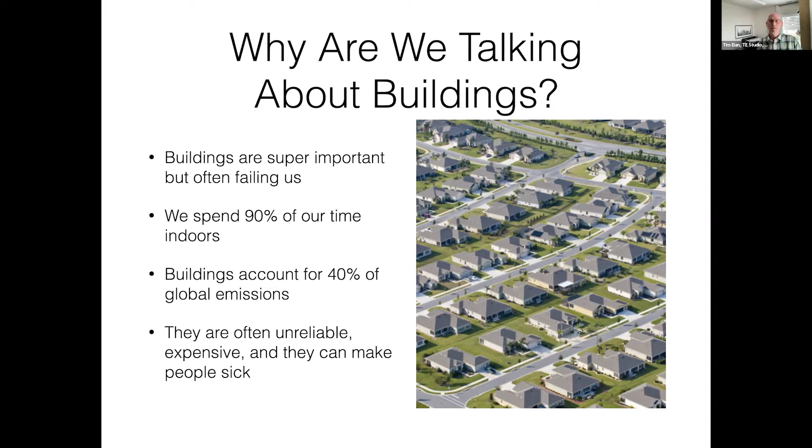So let's for a moment then just imagine the perfect building. It could be your home, your school, workplace, a place for entertainment. How would you describe it? It's a question that I ask clients, that I ask when I go out in public. And here are some of the highlights of what I typically hear. In a cold climate like Minnesota, people definitely want to be warm in the winter inside of a building. But also with the climate shifting a little bit, they are more and more concerned with staying cool in the summer. Nobody likes drafty buildings.

There's also noise associated with that. And more people are talking about wanting low energy bills and little to no fossil fuel use. So they don't want to be part of the problem, they want to be part of the solution. Buildings should generally be affordable to build and operate. I want to stress that second part. Most of you hopefully will understand that building a building or buying a building, while a big expense, is really only part of a larger picture, and that buildings really cost over time. And that's something that we're concerned with as well.

And a really good building should be healthy and free from smoke, soot, pollen, mold, and bugs. Again, these things go without saying, perhaps, but in reality, we've all seen buildings that wouldn't really live up to those standards. Smoke has become a real issue in recent years here in the United States, so it's something that we want to think about. And then coming from an extreme climate zone like Minnesota, we want to make sure that we have a good shelter that can perhaps weather the storm, do a few days without needing energy or infrastructure, and keep people safe. And so that's another big consideration, especially with the climate again shifting.

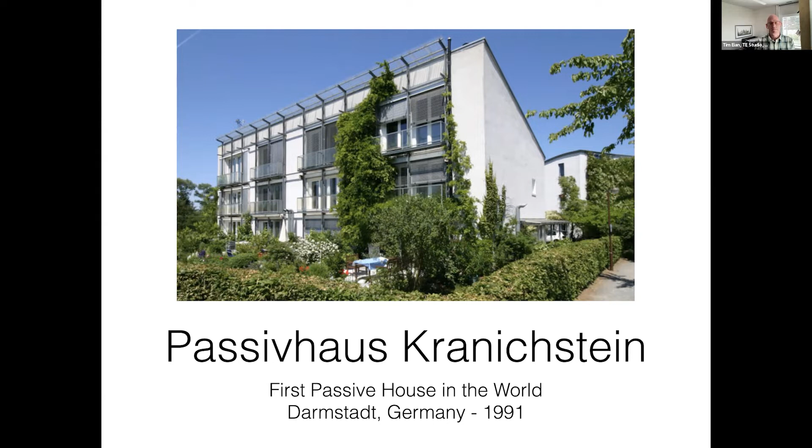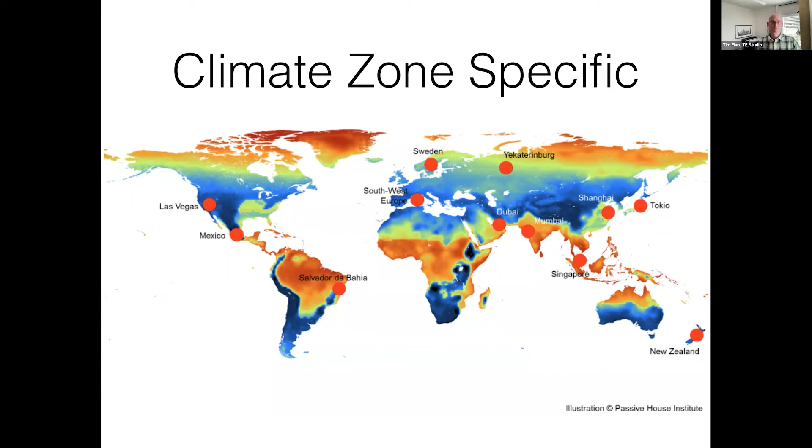Passivhaus is a global standard. The idea behind that is to think globally, but build locally. And it is climate zone specific. So there are targets and metrics and tools that apply depending on where you are on the planet. Arguably, it gets pretty exciting here. I've been practicing Passivhaus for over 15 years here in Minnesota, and our climate has a little of each, right? Hot and humid and dry and cold. And so for Passivhaus nerds, this is a cool place to be just because we have sort of both extreme ends that we need to design to.

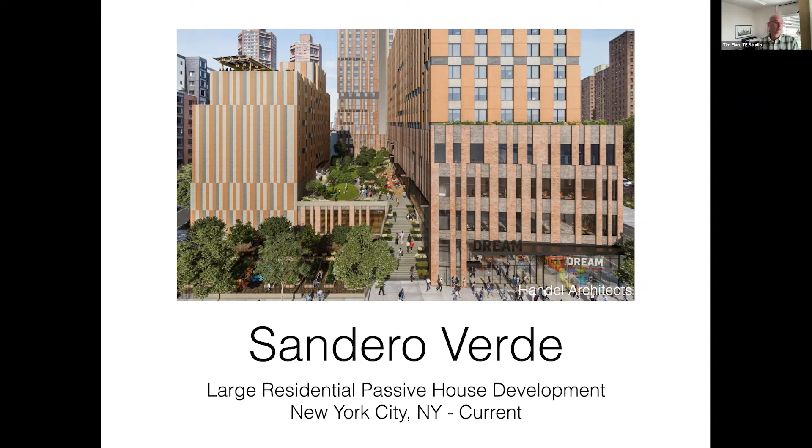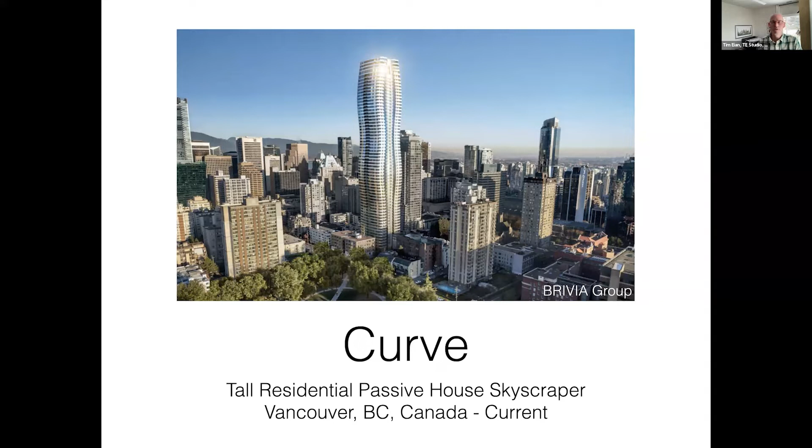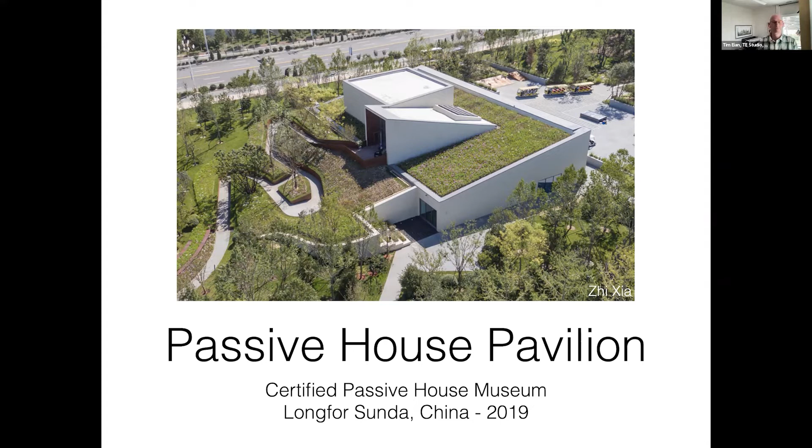Passivhaus is a third-party certified standard. We'll talk about standards a little bit today as well, so you get a little bit of a comparison with other programs out there. You don't have to certify a Passivhaus, but you can. And you can also get certified as a professional to practice in the Passivhaus realm. It's also a vetted tool for sustainable design. And that's a unique selling point for Passivhaus because there are tools that come with this program for architects, for engineers, for consultants that are very, very helpful to illustrate building performance as you're designing. And that's not something that can be said for all voluntary building standards. So this is actually a hands-on type thing. And one of the reasons why I personally gravitated towards it all those years ago.

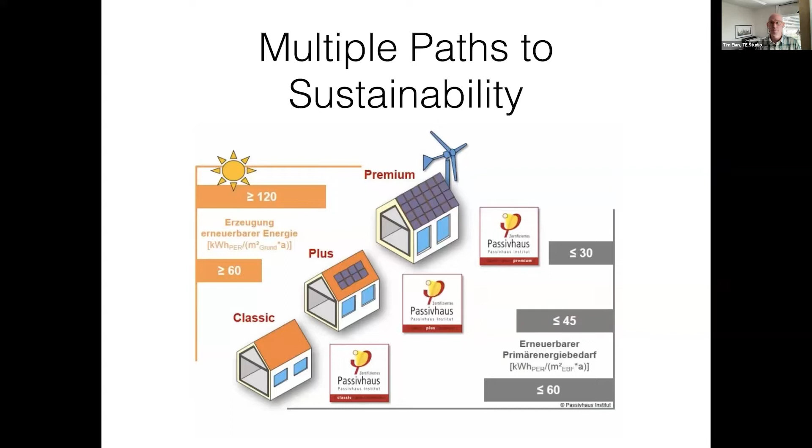There are, as I mentioned earlier, a few different pathways to achieving Passivhaus, and so they happen at slightly different levels of performance. They also bank on varying levels of renewables. The main thing to note here is that you cannot renewable your way out of the Passivhaus standard, meaning you cannot make up for building shortcomings with PV panels or offsite renewables, but you can count them once you make a Passivhaus, and you can achieve a different tier of certification doing that. And again, it applies to all building types, residential, commercial, retrofits, and new construction. And so these tiers can then also be applied to the varying building types. And really it revolves around one basic concept. It's energy conservation first. So we get rid of wasteful energy use, everything that isn't necessary to provide the services that we seek. We try to minimize as much as we can.

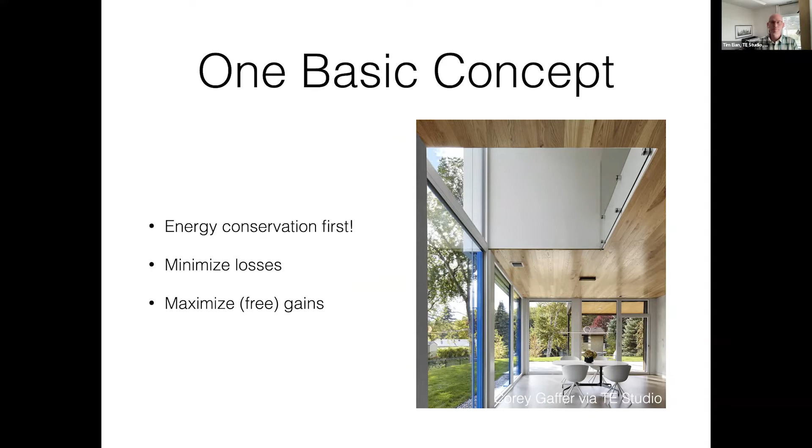5 basic principles from the lower left all the way to the lower right. We have thermal insulation. Now, code stipulates already that you want to insulate a building in Minnesota, obviously, but passive houses will be much, much better insulated. Generally, you can expect 2 to 3 times code levels of insulation in all assemblies, and we want it to be continuous. And then we combine that with what we call passive house windows.

These are carefully selected and put together, high performance frame, good spacer, usually triple pane for a cold and extreme climate like ours. So these will be airtight. They will allow solar heat gains when desirable for the building to bring free heat in and then lock it in with coatings. So they're just a little bit more special than your average window, and they become an active part of the strategy. So think of the building as a thermal battery, and the passive house windows can become the charger for that in the winter. In the summer, it's quite the opposite, and we look at shading them properly.

We want an adequate ventilation strategy at the top. So a passive house, that's the next point already, will also be airtight. And when you make an airtight enclosure, you also need to be concerned with the quality of the indoor air. So we'll have active ventilation in all passive house buildings with a heat recovery ventilator. That ensures that in the winter, the incoming air is pre-warmed with the stale outgoing air, and in the summer, it's pre-cooled. And airtightness is important because leakage in buildings can account for a quarter, sometimes more, of all the energy transfer to the environment. And that's something we don't want. So we want to shut that off.

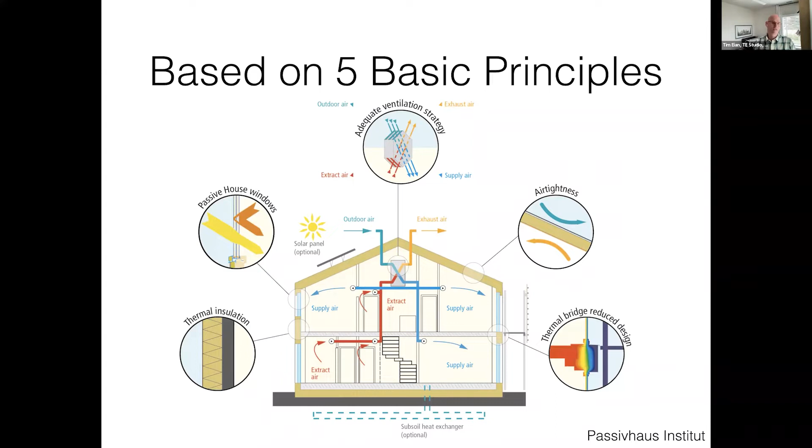You may also wonder how it got its funny name. Active versus passive is really the reason why. So if you consider the buildings of the past as active buildings, you have a building envelope with little to no insulation. It's not very airtight. We're illustrating that here on your left with that window sort of tipped in there. There's imperfections. Now we need a large active mechanical system to provide heating, cooling, those types of services to overcome what the building envelope can't do on its own.

Well, in the passive landscape, we're banking on energy retention and free heat gains. So we really maximize what the building envelope will do, and thereby we can really minimize what active componentry we have to put into a passive house. And that's really where it gets its name. It banks on passive mechanisms, and it's not so reliant on active mechanisms. I'm giving you some numbers down below. Generally, energy is tracked in some kind of energy number per square foot per year. In this case here, the kBTUs, and you can see we're orders of magnitude smaller when it comes to heating energy, and more on that in a minute.

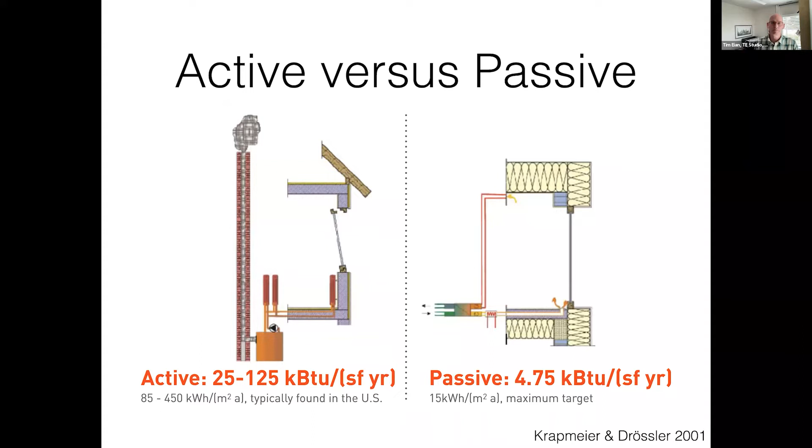So passive house is a real paradigm shift. So if you consider existing buildings and buildings of the past to be synonymous with that tent with the stove in it on the left, it's leaky, drafty, not very well insulated. We have a massive heating system inside of it to keep it comfortable. From there, we're really leaping, and I'm using, metaphorically here, the cooler box as a super insulated envelope, the thermos bottle to illustrate that we're making it airtight. And when you do those things in combo, you can heat it essentially with a candle. So just kind of run with that in your mind right now.

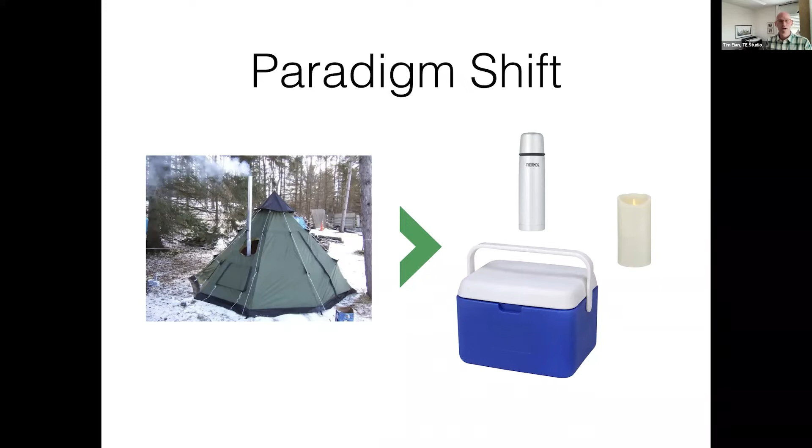Those are the main improvements we're making over the status quo to enable performance. And a few years back, I did a study for the University of Minnesota, and we compared a single family home and its energy usage and footprint between a code building and a passive house. It was the same building, designed exactly the same way. One built to Minnesota code, the other one as a passive house.

And the result is what you see in the slide, the pie chart here. So you can see code buildings consume mostly heating energy in Minnesota, a very significant component. And that in a passive house is massively shrunk. These pie charts are to scale. So overall, I find in a residential setting, to use that as an example, 50 to 75% less total energy use, with the heating energy component seeing the most drastic of reductions. In some cases, over 90% less heating energy is used when the building shell is built properly.

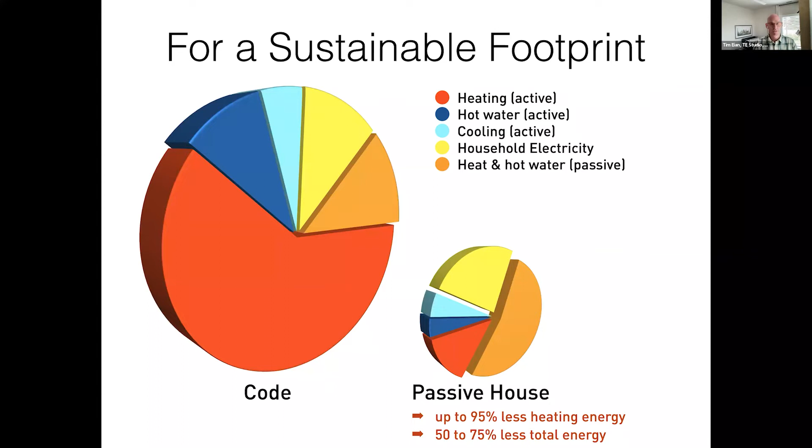And the way that this is tracked, again, is energy per square foot per year. So we establish a gas mileage for buildings, and that's both in our energy modeling and in the real world, you can measure these numbers. And there are some targets. There won't be a quiz here today. You don't have to memorize these, but some of you in the audience, this may be meaningful to you.

And as I mentioned before, there's slightly different tiers. So there's an entry-level certification called low energy building. There's the retrofit component called EnerPHit, and then there's the new construction standard. And in order, they get a little bit more stringent. And you may ask yourself, why do we do that? Well, in existing buildings, the middle tier here, it can be hard to right every wrong, so that you can use a little bit more energy in a retrofit building.

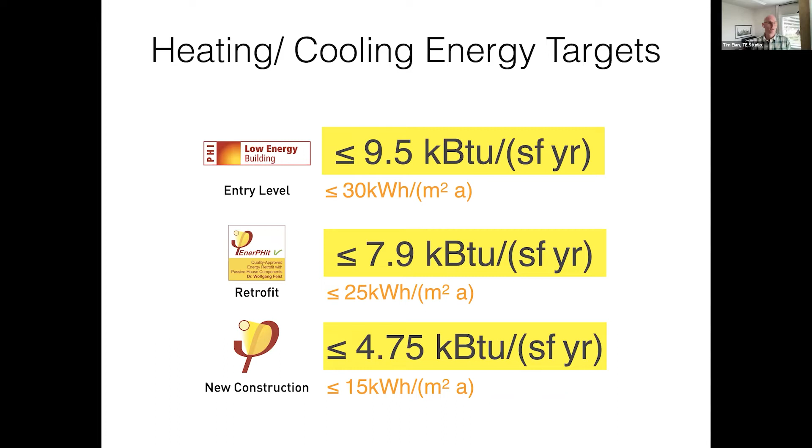And the low energy building standard came out of a desire to be able to certify buildings that maybe have a few strikes against them, even though they're new, meaning either the use or the location don't enable them to meet all the new construction criteria. And so there's an entry level and on-ramp certification that, to be honest, is still a huge leap over code and therefore quite interesting.

There's also source energy targets. Now, source energy is when you track the energy that a building consumes all the way back to where it is made, a power plant, for instance. And the reason why that's being tracked is because that's generally where the pollution happens, where the extraction of energy happens. So we got to make sure we keep a lid on that.

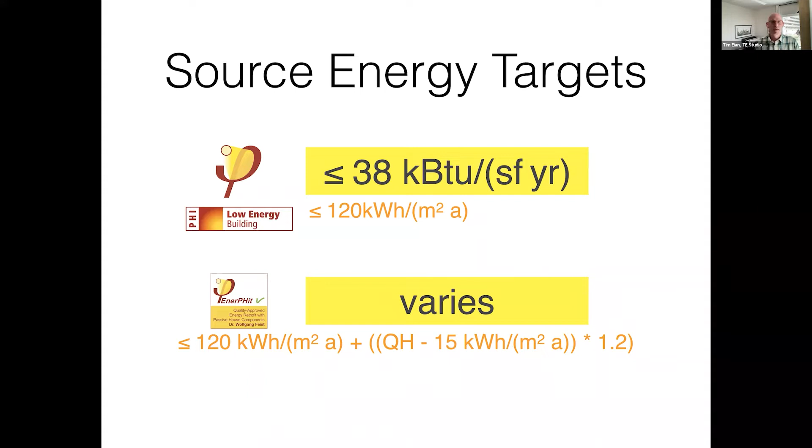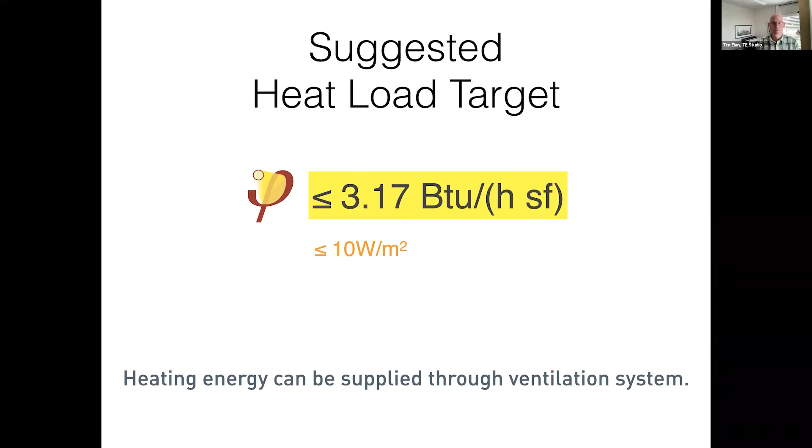And last but not least, here we have a suggested heat load target, and that is something that's difficult to do in Minnesota, but works quite well in more moderate climate zones. When you stay below the metrics here, you can actually heat and cool the building through the ventilation system alone and do away with active heating and cooling systems altogether, which is quite nice, but doesn't work in Minnesota with our current climate data.

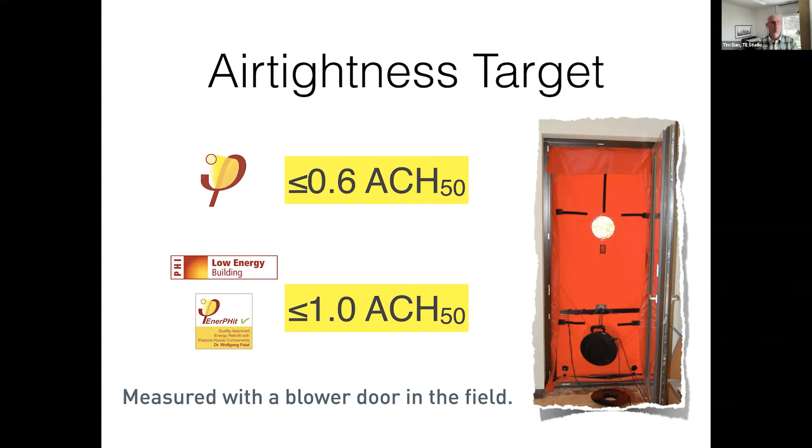Airtightness, I mentioned it before, is a key component here, is also being managed and tracked, and 0.6 air changes at 50 pascals pressure is the target for new construction, and that has been readily achieved for the last 15 years or so since we've had Passivhaus in the United States. Code, for comparison, is 3 air changes at 50 pascals for a residential building, so a Passivhaus is 5 times tighter.

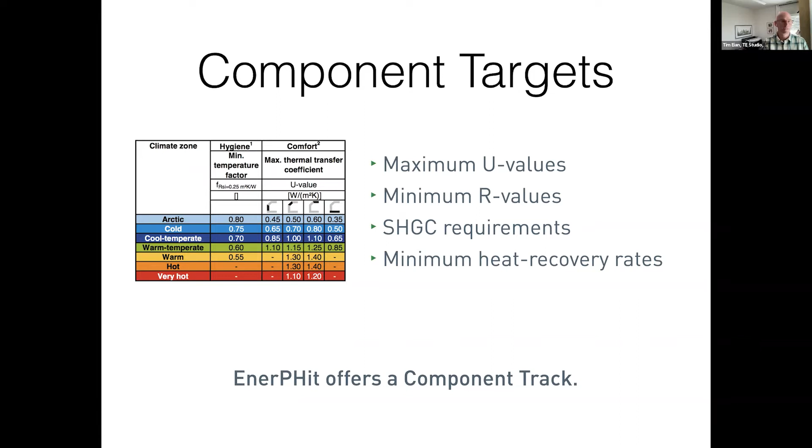And when you do retrofits, you do have some component targets. So sometimes when you can't get the entire building to perform at a certain level, you can also upgrade individual components to specified levels and do it that way. And that can also be very attractive.

All Passivhaus buildings are energy modeled in a program called the PHPP, the Passivhaus Planning Package, which has been vetted the world over by different organizations, including ASHRAE, and found to be very accurate and helpful. And this is the ultimate way to value engineer a building, because concurrently with design, the PHPP will tell you how your building is performing, and you can now be much smarter about selecting windows or glass or insulation.

So just a couple of bullet points here. Principles and metrics apply to all building types anywhere in the world. They're universal, just based on sheer building science. There's nobody who benefits or profits off the standard itself. So there's no agenda in the background.

We're really just using pure metrics to deliver a sustainable carbon footprint and superior human comfort, well-being, and optimized life cycle cost. They're not arbitrary. They're based on these things that I told you that we would like to achieve in buildings. And they're absolute targets with measurable results. Passivhaus has been around since 1991, as I pointed out. So there's been many studies to validate the standard.

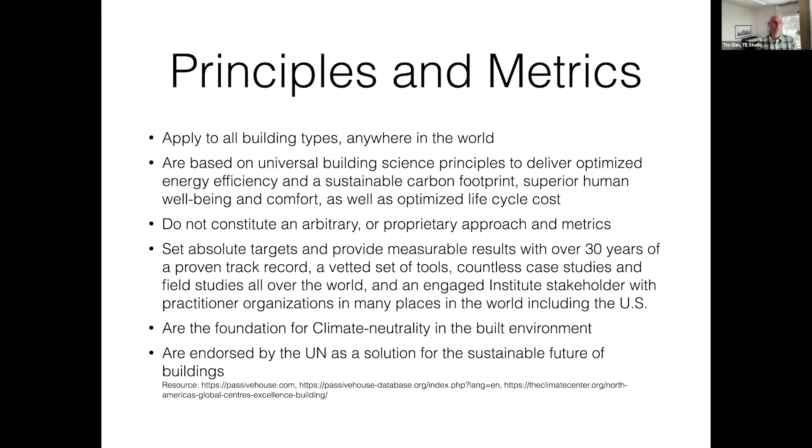It's a foundation for climate neutrality in the built environment, and therefore has been endorsed by the UN as the solution for the sustainable future of buildings. I won't read out all of this here. I just want to give you an idea of delivery and certification.

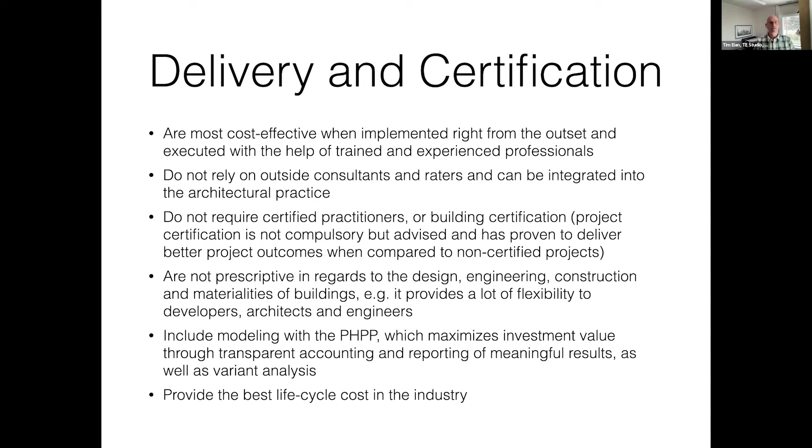Passive houses are ideally delivered by a team of people who have a little bit of history and maybe some education with it. That'll be the most effective way. And while you don't have to certify a passive house and people doing one don't have to be certified, there's definitely some benefits to that. And maybe that's something we'll talk more about today.

Passive House has a very clear focus. It doesn't really compete with other programs like LEED, for instance. It focuses on energy and thereby directly affects your building envelope, mechanical systems, maybe electrical systems, and renewable energy systems. There are indirect components that are affected: water systems, stormwater, building materials, and embodied energy and carbon.

And again, this may be something where we go a little deeper later. I just want you to know it has a sort of laser sharp focus on operational energy first and foremost, and other things are sort of indirect benefits that come with it.

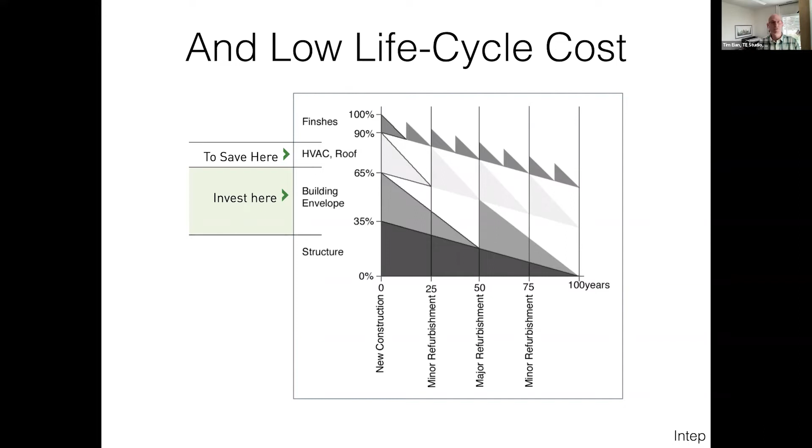But then when we get to HVAC, that may only be 25 years, and with today's tech, sometimes less than that, and then finishes, of course, wear much quicker. And so what happens with the passive house is you're taking investment from a mechanical strategy and dumping it into the building envelope, and thereby every dollar you spend here will go twice or maybe 3 or 4 times the distance. And so it is a smarter investment over time and pays you back.

So with that, passive house defines the long-term building quality and performance independent of energy supply. It reduces the amount of useful energy needed to own and operate a building significantly. So that's sort of my first step here in bringing you what passive house is. Let me show you some examples that are local to us.

The Waldsee Biohaus, 2006, Bemidji, Minnesota, officially the first certified passive house in the United States, actually on the continent. And then just a couple of years later, Passive House in the Woods, a project we did in Wisconsin, became the first certified passive house on the other side of the border. Minifit House, one of the first cold climate retrofits to passive house standard in the world, was a pilot project in 2012. A project that started out as certified passive house became a PHIUS certified multifamily affordable housing project here in Minneapolis, Hook and Ladder from 2016.

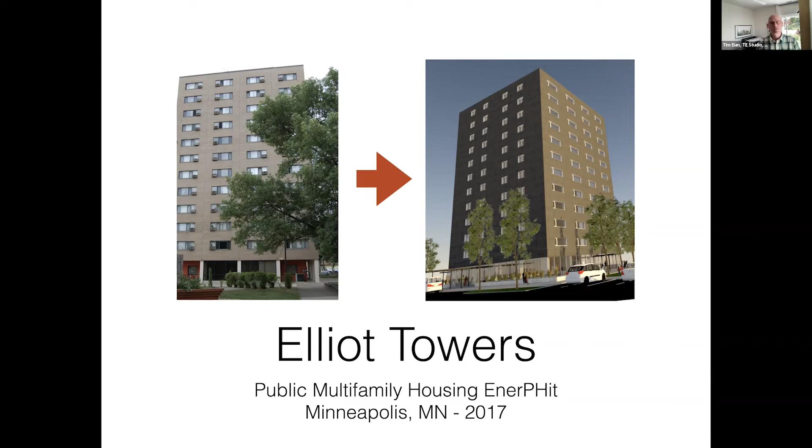And a project that again started out as a passive house retrofit, in this case for public housing, Elliot Towers, later got done a little differently, but these are some of the landmarks that we have. Lexington Parkway Passive House, Minnesota's first Passive House Plus with a significant renewable energy component. Can't see it, it's hiding on the roof. And then the same thing here for Minneapolis in this example. Last but not least, Bright House completed this year the first affordable housing project in the state done to the Passive House Building Energy Standard.

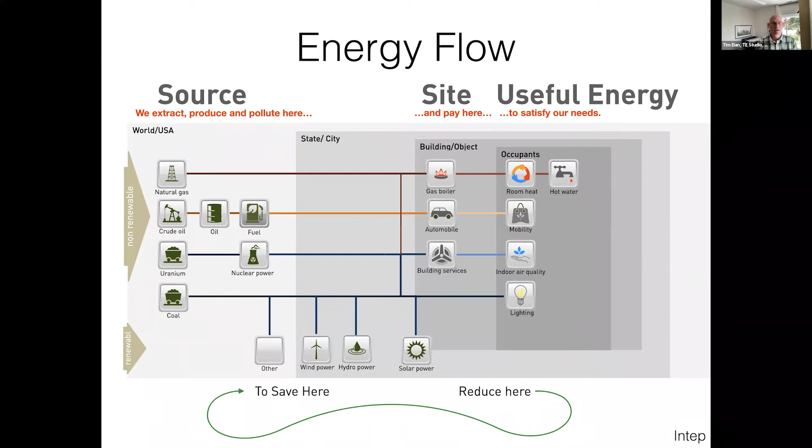So every bit of energy that you can save on the right-hand chart of the site, you also save lots of energy on the left-hand side. And that's mostly because there's loss factors and other things. So there's kind of a thing spinning up. When you save on the right, you save even more on the left. I'm going to skip over that for the interest of time. We can come back to that.

The pledges that we have in most parts of the world are fairly insufficient. We're not really looking all that great at the moment. And the reason why I say that is I don't want to create a doomsday scenario, but I want to give you the impression we have tools like Passivhaus that can leapfrog, that can help us make things like that look a lot better. And with that, we can sort of win our own climate Olympics. Right now, we average about 20 tons of CO2 per capita per year. And to get to where climate scientists tell us we need to be, we really need to bring that down to 1. So that gives you an order of magnitude of what we're facing.

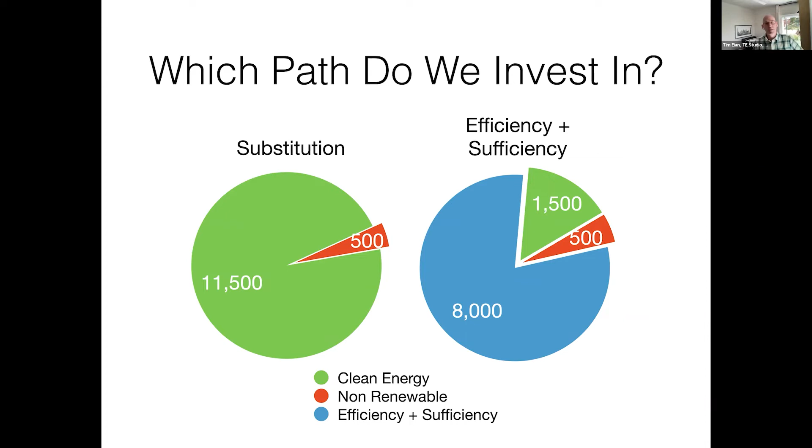So when you bring that back to a residential home, for instance, and the energy that is used there, we have sort of 2 ways that we can do it. We can either try to substitute the footprint that a building has with all clean energy here on the left. So we have to make a significant amount of clean energy, much more than we're making today. And then the other option we have is we simply come up with efficiency and sufficiency measures so that we don't need that much energy anymore. And you can see we have a much better shot at using a green grid wisely and making that go the distance.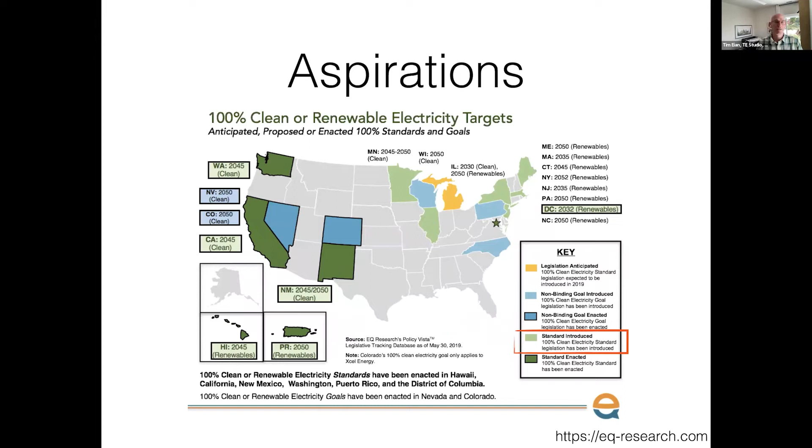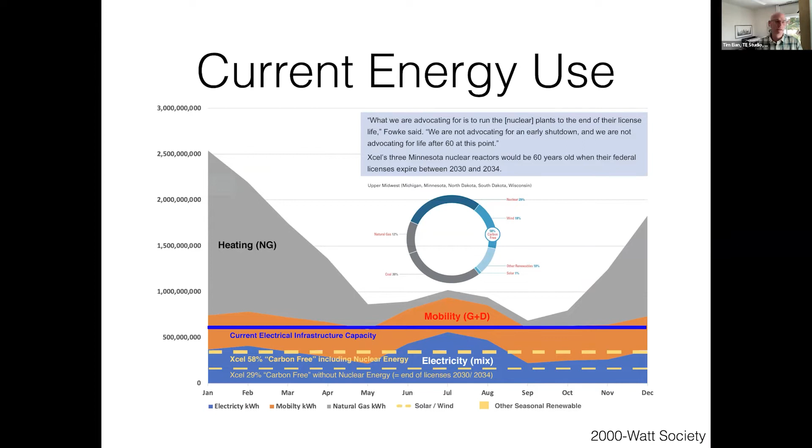So in Minnesota today, again, we have these aspirations. We have a standard that was introduced here for 100% clean electricity by mid-century. This is a graph for Minneapolis, how all energy in Minneapolis is used. When you look at the gray mountain in the background, you can see we use mostly heating energy, much more than we do for driving and lighting and other things like that. And that's really the mountain we need to conquer. So our clean energy plan of business as usual plus electrify everything leaves us with a very, very significant hill.

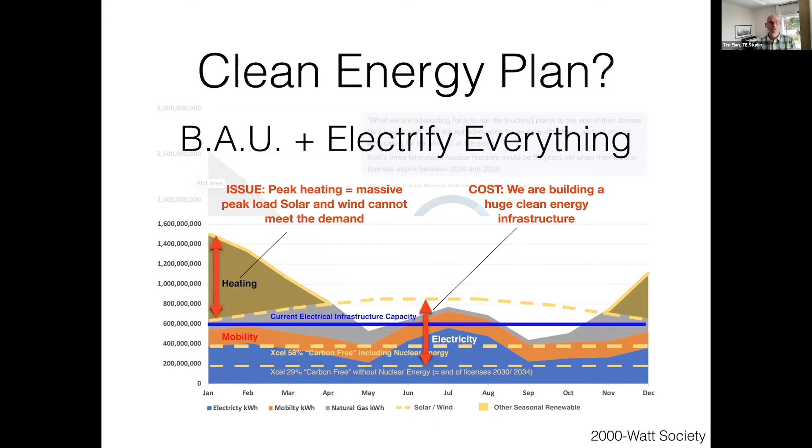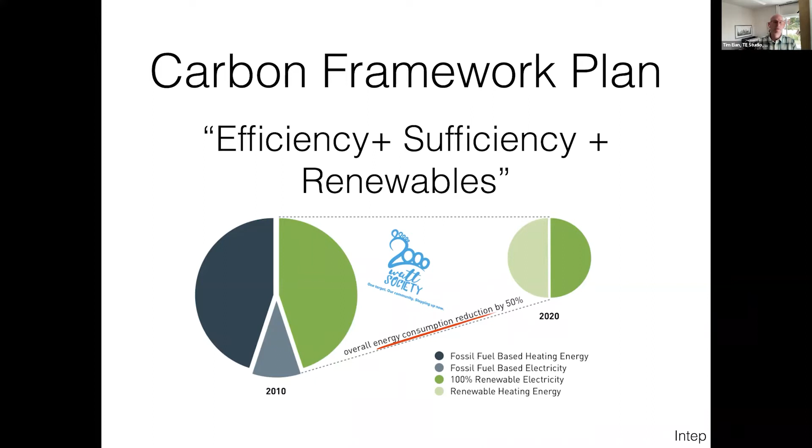So I call that we have a hill and valley problem. We can't make renewables in the winter very well. And so we don't know how to get on top of that. So again, we need to be a little smarter and come up with a carbon framework plan that leverages efficiency plus sufficiency and then modulates the renewables. Here's a study that we did for the city of Vancouver that shows how that's done. You reduce the energy footprint first, and then you come up with fossil-free energy production to get on top of it.

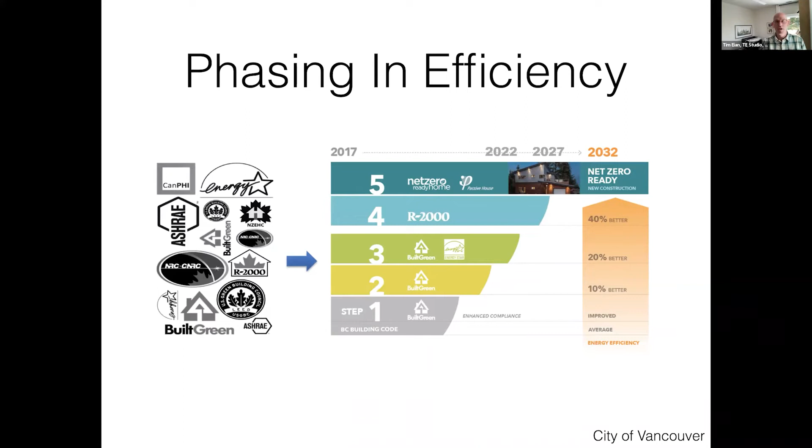And then Vancouver, in turn, decided for buildings, they're going to turn this into a multi-step program, a 5-step program from now until 2032. And this program is currently active. And the way that they're telling building designers to do it is with Passivhaus. This is officially from the city of Vancouver's website, and you can see that spelled out right there.

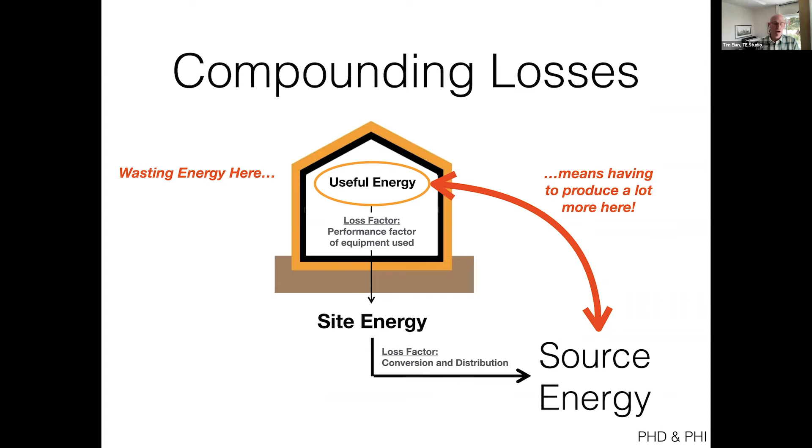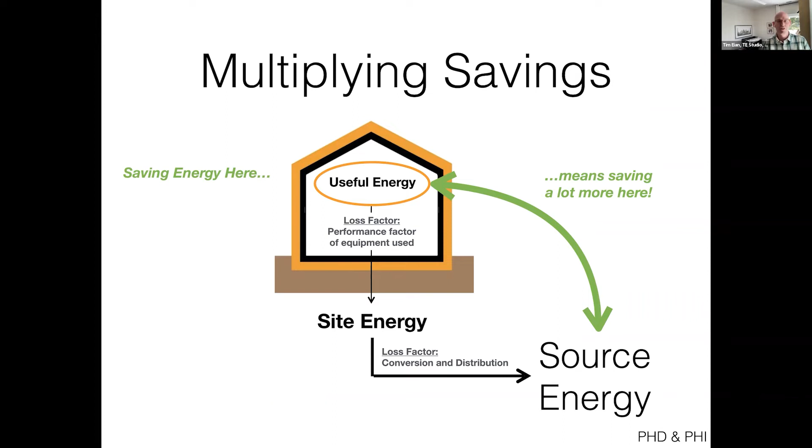And again, the reason why we do it: useful energy has a loss factor to source energy where the pollution happens. So wasting energy inside of the building means we have a lot more source energy we need to make. It's compounding. On the flip side, if we build a Passivhaus and we're very mindful and use energy sparingly in the building, saving energy here really spins up multiplied savings on the source energy side.

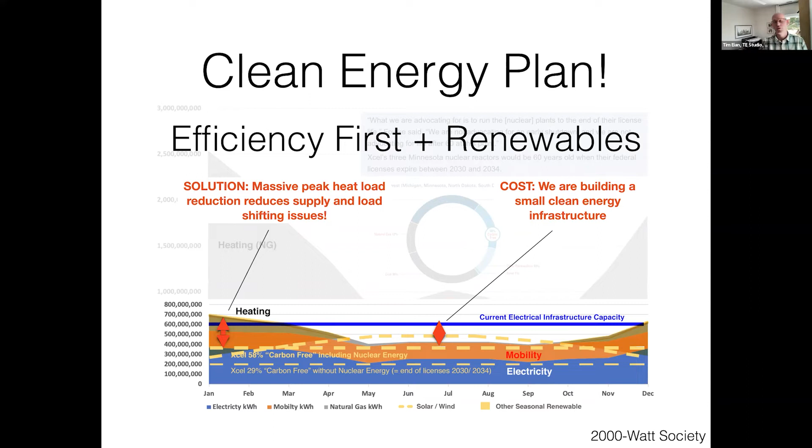And mapping that out for the city of Minneapolis, you can see if we retrofit buildings to Passivhaus and build new to Passivhaus, remember that mountain in the background, I kept it in here, it's gone. We can reduce it so much that we can almost meet the entire demand with our current electric infrastructure. So a Passivhaus strategy works and can help us meet our carbon goals and climate goals and green grid goals that we currently have.

RMI found the same thing. They came out with an outline here called decarbonizing homes, and the term that they coined, beneficial electrification. I won't have time to get into the details with that, but you can do a deeper dive there and see why what I'm telling you today can be done with Passivhaus. And then, by the way, we can also reduce embodied energy.

And one of the benefits of the Passivhaus Planning Package energy model is that it also offers a thing called the PHribbon, which is a carbon counter. So you can see what building materials you're using and how they're affecting that. And you can be smart about doing this in a way that doesn't additionally burden us with climate footprint.

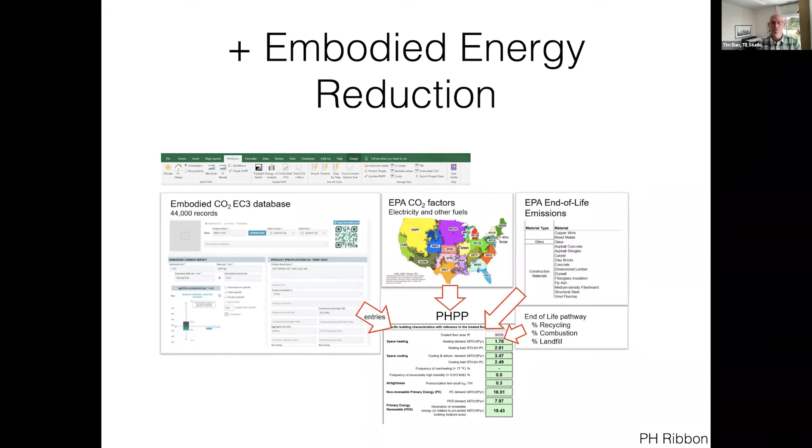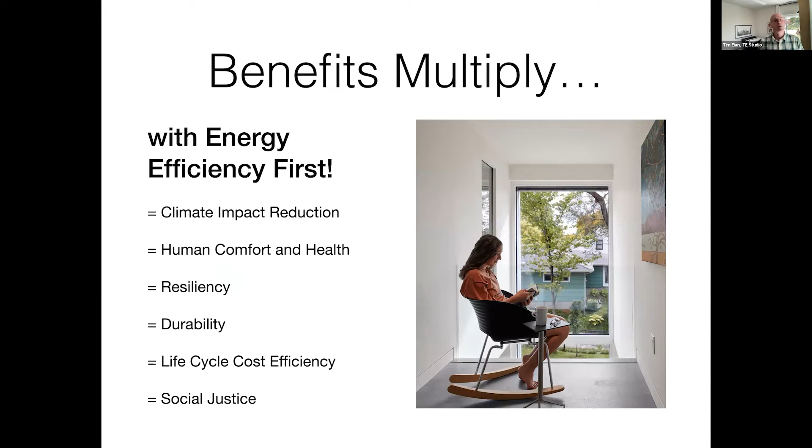So in sum, efficiency first, paired with renewables, is really the foundation for meaningful climate action. And in a Passivhaus, we then multiply these benefits of that strategy with human comfort, resiliency, durability, life cycle cost efficiency. And there's also a social justice component, again, a piece that we could do a whole other talk about, but that's the benefit of Passivhaus. So it transforms the status quo.

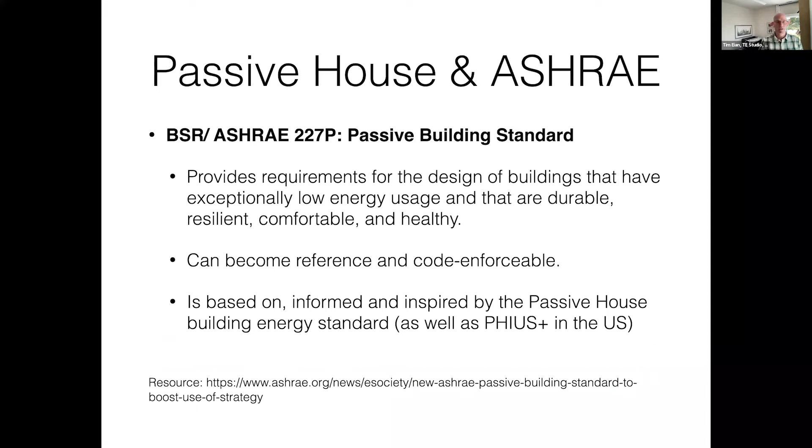With code, we exceed all the minimums with a Passivhaus, so there's really no competition. We just make buildings much, much better. And actually, Passivhaus has become code in some jurisdictions around the globe, not in Minnesota at the moment, but in other places. When we look at ASHRAE, ASHRAE is intrigued by Passivhaus and actually currently has a working group that's looking to perhaps create their own or adopt the passive building standards that are in the market. So they're also looking at it.

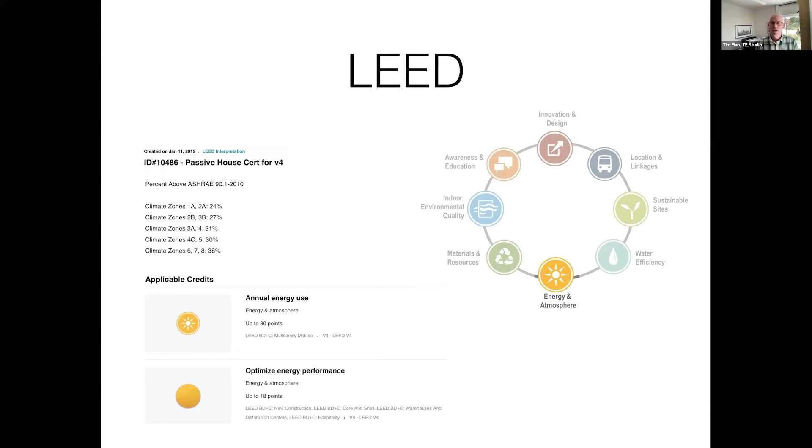LEED has a program that recognizes Passivhaus for full points in the energy component. So if you do a Passivhaus, you qualify for full credits for energy. The Living Building Challenge also has a crosswalk. So again, here for their zero energy certification, you can use the Passivhaus certificate, so that plugs in readily. Enterprise Green Communities in Minnesota gives you extra points, and it looks like that may be spelled out even more explicitly going forward. Minneapolis came out with a sustainable homes policy in 2020, $5 million, up to 20% of cost or $90,000 per unit for affordable housing units built to the Passivhaus standard.

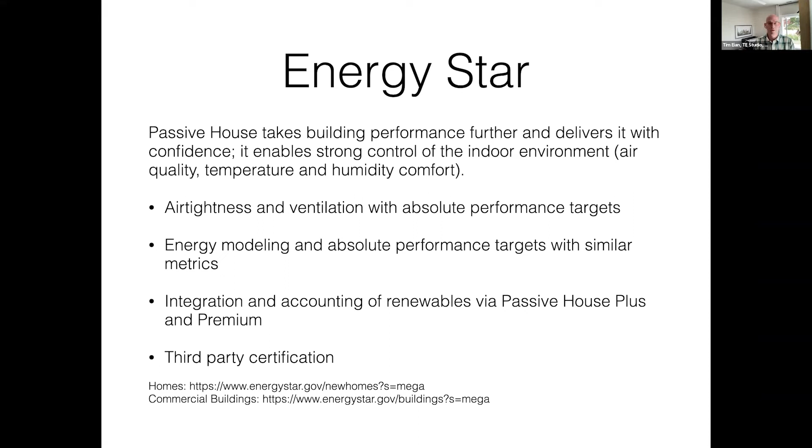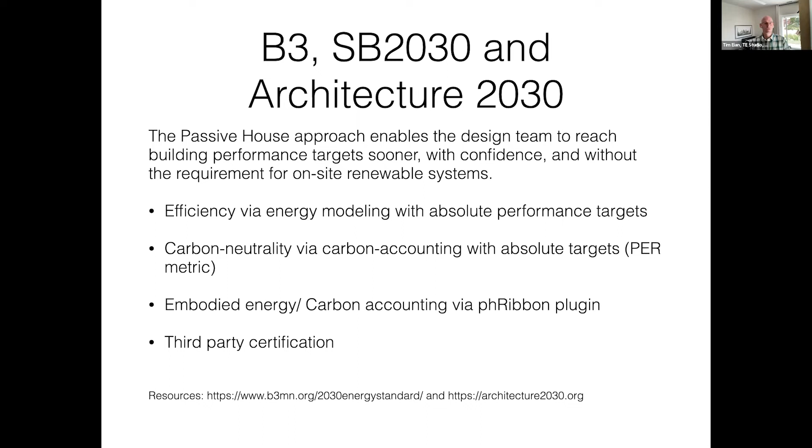Energy Star, again, there's no competition here. You're meeting the spirit of a program like that quicker, and you're just doing much, much better. And the local program, B3 SB2030, and Architecture 2030, which is very similar, is very encouraging of it. And again, if you take a Passivhaus, you can readily plug that into those programs and meet their targets. We could talk more about that.

The CSBR here at the U of M has endorsed the program. Architecture 2030 spells it out just shy of naming Passivhaus, but when they talk about their goals, they say energy efficient design strategy, proper orientation, daylighting, passive heating and cooling. So, I mean, you can put two and two together. What they're describing there is a Passivhaus.

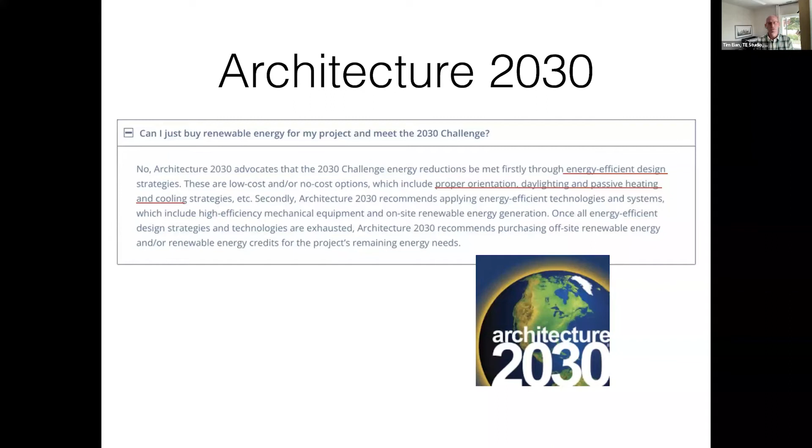So the key findings, just a couple more things here in the minutes that I have that I can give you as a practitioner here in Minnesota. When we go for Passivhaus, the differences in construction and systems are manageable. They require some diligence, and it's good if you have somebody on your team who has experience, particularly for the design and energy model. That's a good idea. But it can be done even with people who are still learning on the job. It costs differently on day one due to the investment in sustainability, and it costs differently over time as well.

So most of you will ask yourself, well, how much more does this cost? It's the number one question I always get. And the answer to that is it doesn't really cost more, it costs differently. You invest like you would in a solar panel in a better shell, and that shell pays you back for the life of the building. So ultimately, it's the cheapest building you can own and operate.

But on day one, we see cost anywhere from 0 to 10, maybe 12% more. And this has a lot to do with who does it, is it the first time doing it, and other things like that. But we've also seen in some markets that between comparable projects, it doesn't cost more at all, that sometimes the market differences of who does a project are actually greater than making a building a Passivhaus. So take all this with a grain of salt. The life cycle costs are cheaper. We don't have time to give you case studies today, but we've conducted a bunch of them.

And so that's even before anybody puts a cost or value on human benefits like comfort or health or anything like that. The energy performance is entirely different, as I showed you. Heating is no longer a major consumer of energy, and so we can focus on other consumers of energy. And also, because heating is not really a challenge anymore, we don't have to worry about it. So if the power goes out in the dead of winter, fine. The building isn't going to freeze. Nobody's going to die. So it gives us that resilience.

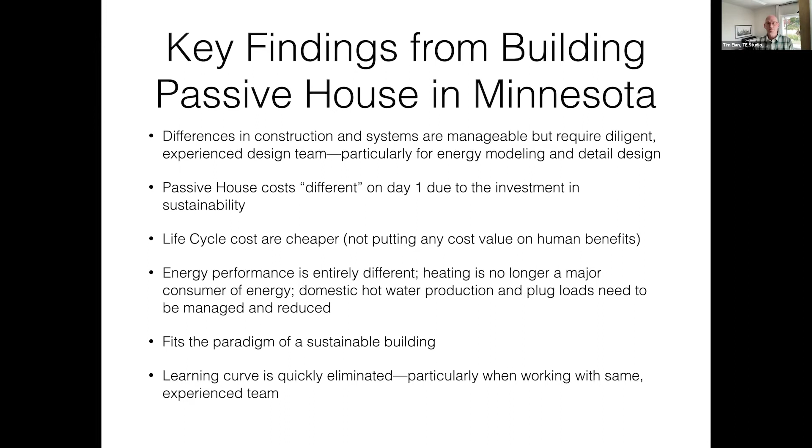So thereby, I would say Passivhaus fits the paradigm of sustainable building that we're all talking about. And maybe last but not least, the learning curve that so many perceive in the market is so quickly eliminated. Having done this now for 15 years here with regularity, once you get your feet under you, it's really not a big deal, or not as big of a deal as many people think from the outset. All right, so I got 4 more minutes to the comments here.

So I want to leave you with a couple of things that you can do, because that's also a question I often get, and I want to leave people encouraged and going out there, telling others about what they learned. So the first thing is actively think about and consider Passivhaus. You've now heard about it, you've learned a little bit about it, look it up, do a deeper dive, and when you come across a project, when you talk to stakeholders, no matter what your role in it, float that term, see if people have heard about it or if they're open to considering it.

Renovate your own house or other buildings and build to Passivhaus standard. This is really something that solves a lot of problems for us individually, financially, on a global scale. So look at it that way. And for those of you who are in decision-making positions, require it. Simply ask your teams to deliver Passivhaus projects for public buildings, private developments, doesn't really matter. Many places around the world do already, and that list is only ever growing.

And then for yourself, consider getting Passivhaus trained or certified. I'm also here today as a representative of the Passive House Network, which is our North American organization. You can get certified, your building can get certified, and materials and products that you make, components that you make, can also get certified under this program.

And here's just a few resources that I can leave you with today. So we have our stakeholder organization, the Passive House Institute, who is sort of the curator of the standard. But again, there's really no monetary gain here. This is not a for-profit endeavor. This is more of an educational setting where this is coming from. We have our global user organization, International Passive House Association, that puts on global events like this November. We have open days, which happen twice a year all over the planet, where people share their Passivhauses and you can go and tour them. There's always one open here in Minnesota somewhere.